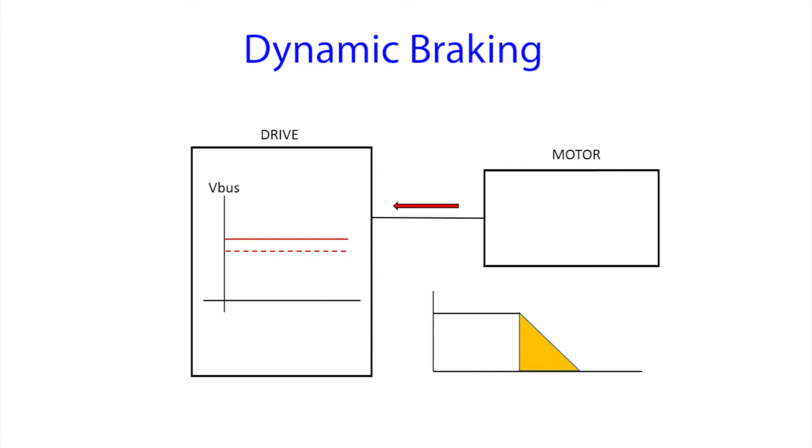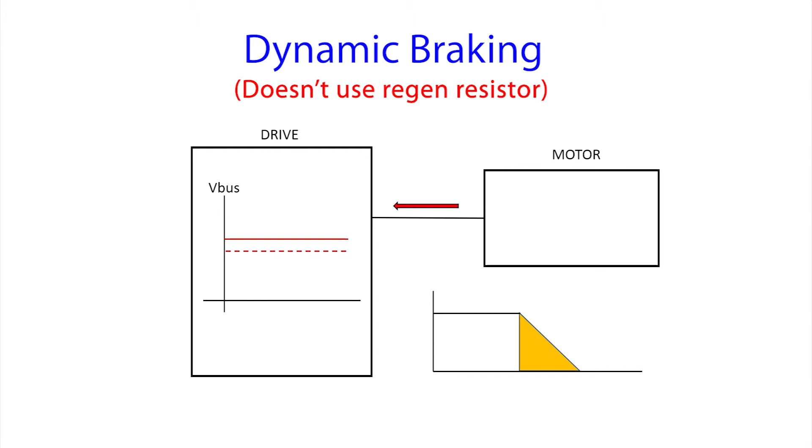Dynamic braking watches that bus voltage and dynamically adjusts the decel ramp so the bus voltage doesn't get too high. It's important to understand that dynamic braking in a SureServo 2 drive doesn't use a regen resistor to dump excess energy. It only modifies the decel ramp to slow down the regen current. Regen braking is covered in a separate video. This is easiest to see with a live example, so let's do it.

This is the exact same hardware as the quick start video, except I added this 4-pound steel pulley to give us some inertia. I reset the drive to factory default so you know exactly where I'm starting from, and I power cycle the drive. That clears out any residual volatile memory locations. I then changed it to speed mode and power cycle the drive again. That power cycle is real important because it sets up the drive for the new mode. And here's a tip. If you can't get the motor to spin after a mode change, it's probably because you forgot to do the power cycle.

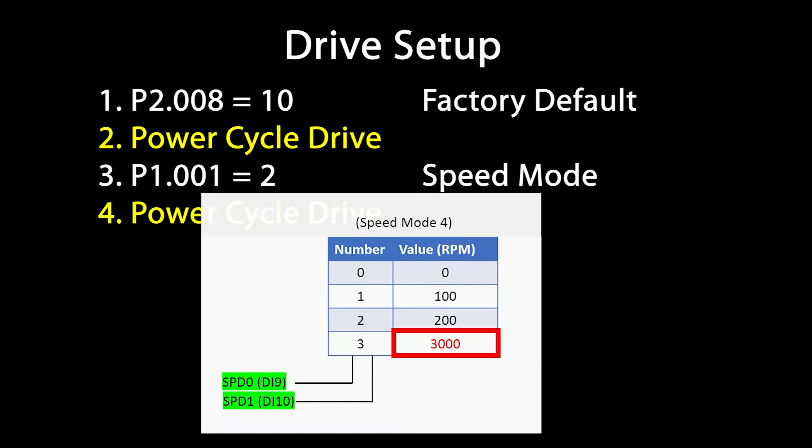In speed mode, you can set up 2 digital inputs to select one of 4 preset speeds. I'm using digital inputs 9 and 10 for that. These are the default speeds, but I changed this one to 3000 RPM and set the 2 digital inputs to on, so when I enable the servo motor, it ramps immediately to 3000 RPM. And when I disable the motor, or issue an override, or get a fault, the drive drops to 0 from this 3000 RPM. These are the parameters you need to do all of that.

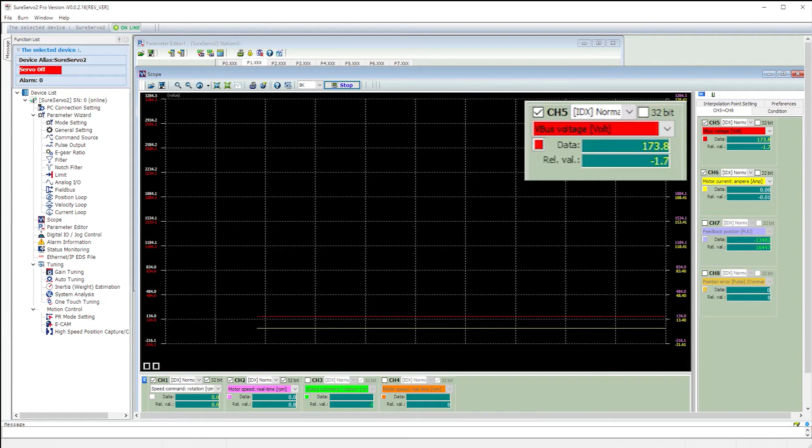Let's bring up the SureServo 2 Pro software scope function. I'll hit run, and while we're waiting for that to come up, we see we're viewing the commanded speed in white using 32 bits, so it uses 2 of these, the actual motor speed in purple, also using 32 bits, the bus voltage in red, and the motor current in yellow.

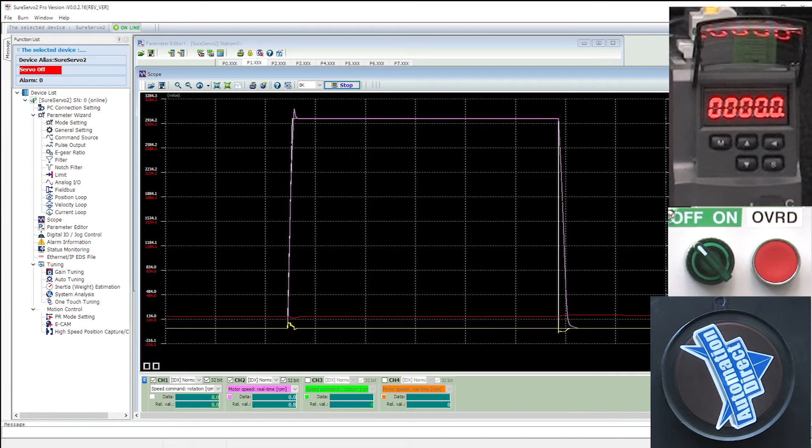When I switch the servo on, the white commanded speed goes right to 3000 RPM, and the purple actual speed follows that as best it can. I haven't tuned this drive yet, so we have a bit of overshoot. Watch this video to learn how to fix that. When I disable the motor, the white speed command goes straight to 0, and we see dynamic braking is working really hard to bring the purple actual speed to 0 with no alarms or errors. And it did a pretty good job.

I'll stop the scope, and if we zoom in on the decel ramp, we see that dynamic braking was able to get that heavy load close to 0 RPM in around 400 milliseconds and fully to 0 in around 600 milliseconds. Cool.

We also see while the motor is running at 3000 RPM, the bus voltage hangs around 170 volts on this drive, and the current needed to keep the motor spinning is only a couple tenths of an amp. But when we switch the motor off, the red bus voltage rose from around 170 volts to 190 volts because the motor pushed the yellow current of almost 5 amps back into the drive.

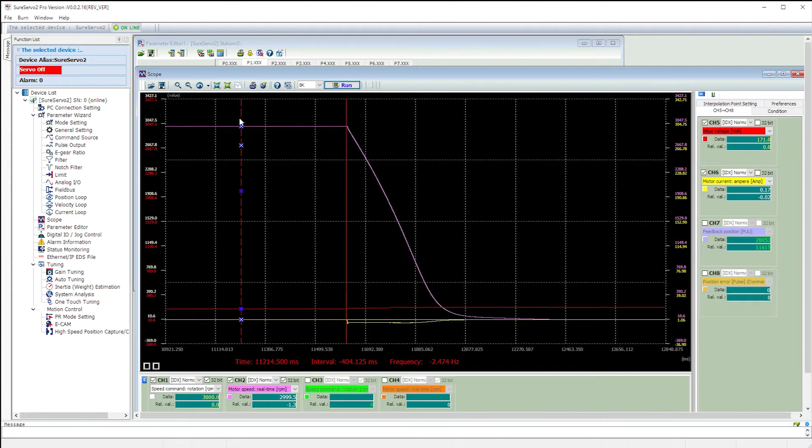The minus sign tells us the current is going back into the drive, and we can see the negative current here in yellow. I'm going to hit this button, which maximizes each trace and gives it its own scale so everything's easier to see. Again, the white commanded speed went to 0, the motor pushed the yellow current back into the drive, which raised the red bus voltage, and dynamic braking manages the decel rate to keep that voltage from

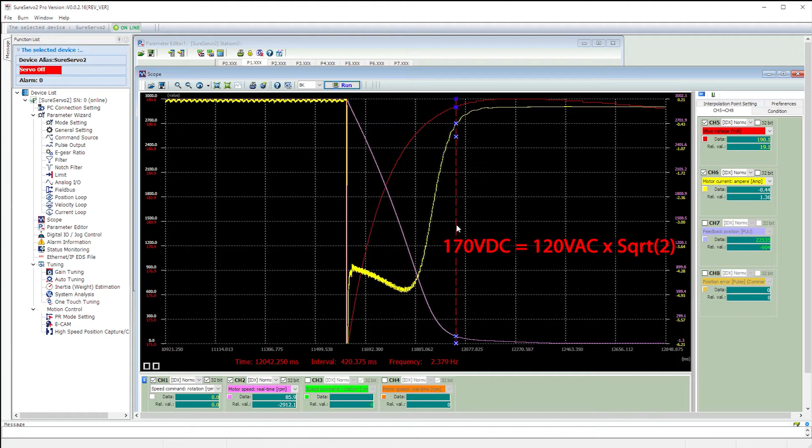getting too high. My nominal bus voltage is around 170 volts because I'm using a 120 volt supply. If you have a 220 volt supply, then this will be around 312 volts. Let's swap out the 4-pound pulley for a 2-pound pulley. This will have less than half the inertia, so let's see how dynamic braking handles that.

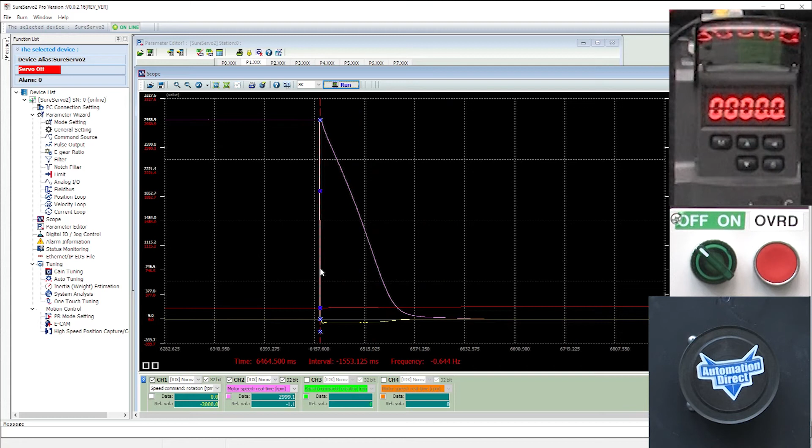Let's start the scope. I'll switch the servo on, wait a second, and then switch it off, and stop the scope. Zoom in on the decel ramp, and sure enough, we now see it's only taking dynamic braking around 100 milliseconds to get close to 0, and a total of less than 200 milliseconds to completely stop.

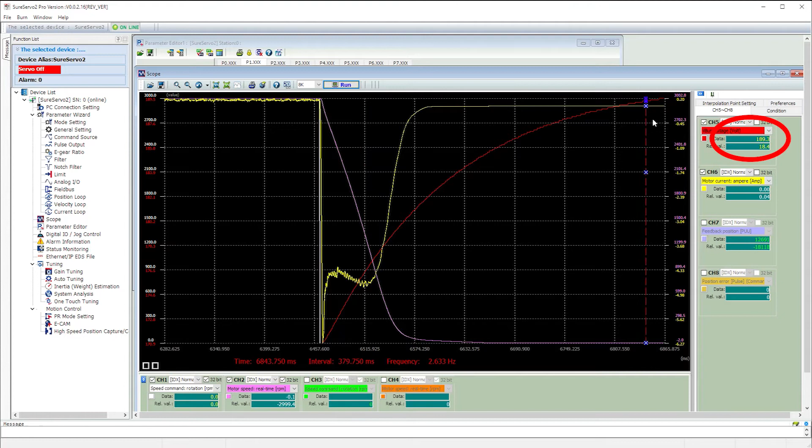And if we optimize that display, we can see dynamic braking is still allowing almost 5 amps back into the drive, and it's still allowing the bus voltage to go up to 190 volts. But it's taking full advantage of that to get a faster decel ramp. Nice.

Of course, you can also disable dynamic braking. I'll go to parameter 1.32 and change this to a 10 to disable braking. I also switched back to the 4-pound pulley to give us a more dramatic result. I'll start the scope, switch the motor on, and then switch it off, and I'll speed up the video so we don't have to wait for it to spin down.

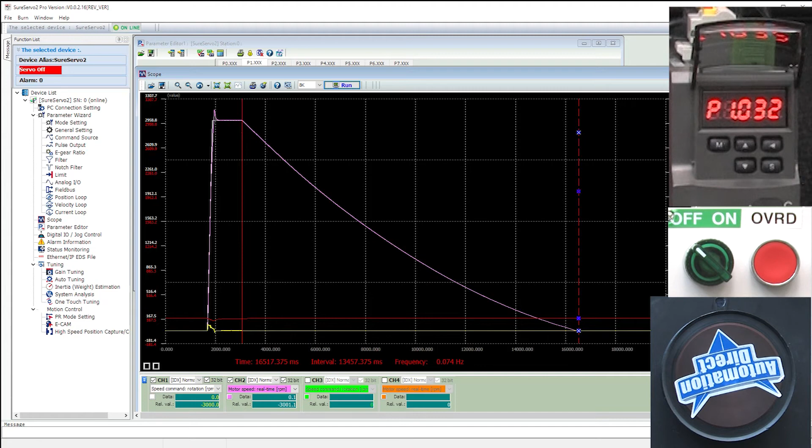Wow, it looks like it took around 14 seconds for the motor to spin down without dynamic braking. Compare that to the half second we had with dynamic braking. So yeah, dynamic braking makes a big difference.

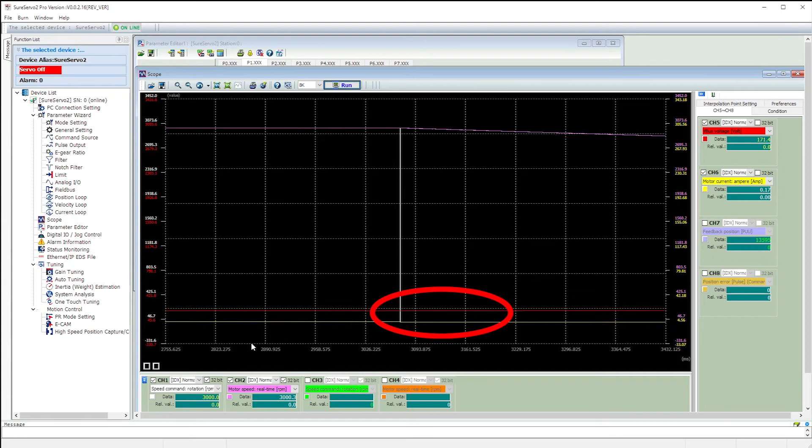And look at this. If we zoom in on the white speed command transition from 3000 to 0 RPM, we see there was no impact on the current or the bus voltage because we weren't trying to force the motor to stop. So the motor didn't become a generator trying to shove current back into the drive. So we can turn dynamic braking on and we can turn it off to let the motor free spin.

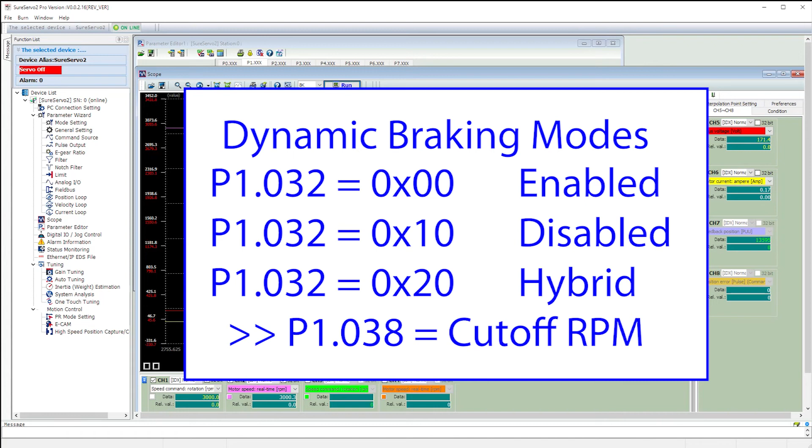Well, guess what? There's a third mode that does both. It uses dynamic braking down to a certain speed and then releases the motor to free spin the rest of the way. You put whatever cutoff speed you want in parameter 1.38. I put 200 RPM in for the cutoff speed and ran that test. And this is what I got. Braking down to here, free spin afterwards.

It also sets the 0 speed output bit once it hits this level so other processes know it's safe to do their thing. Again, that may be handy for applications where you just need to get the dangerous speeds shut down as fast as possible and don't really care about getting it exactly to 0.

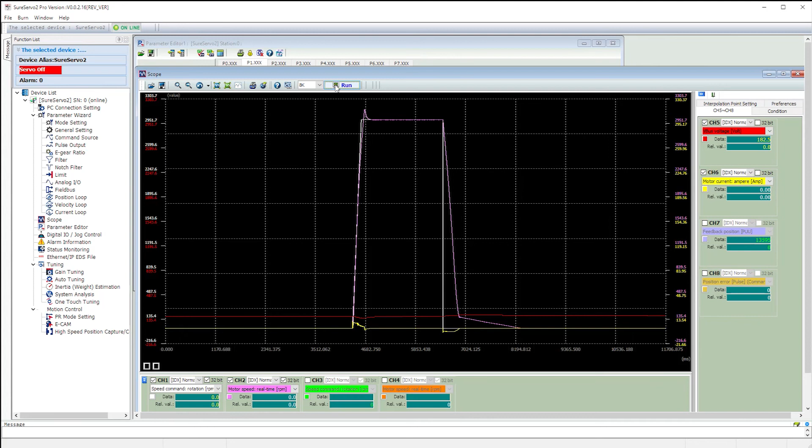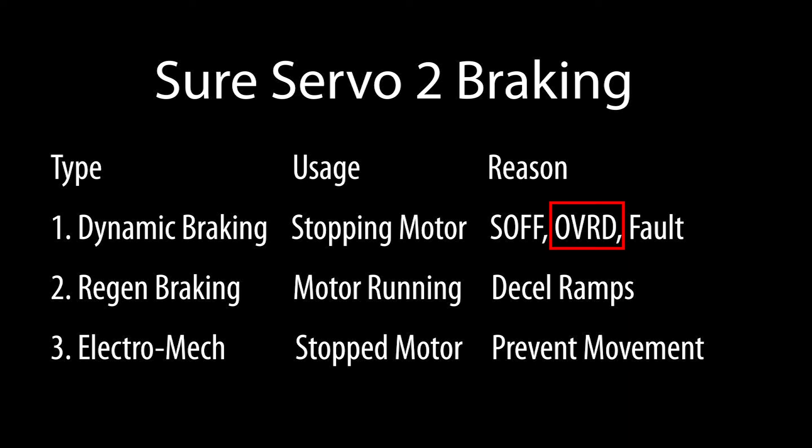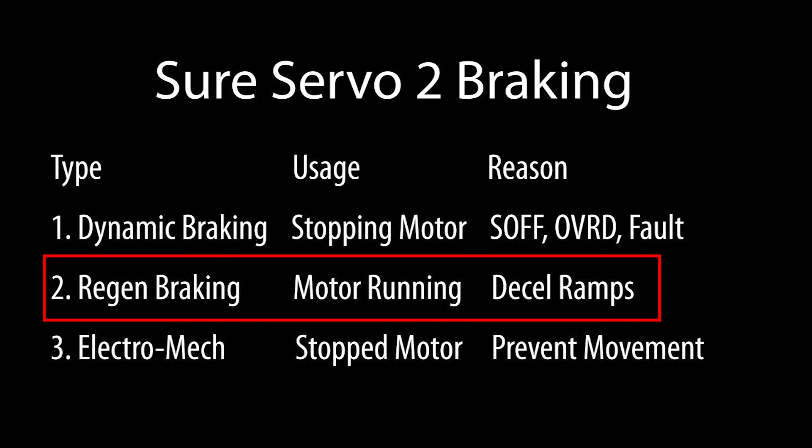Well, that should give you a pretty good feel for how the dynamic braking built into the SureServo 2 drive works. Understand that dynamic braking is only used when you disable the motor, when you issue a motor override via a digital input, or have a fault. The normal decel ramps in the various operating modes use the braking or regen resistor to automatically accomplish whatever decel ramp you ask for, assuming the drive and resistor can handle it. We'll cover that in the next video.